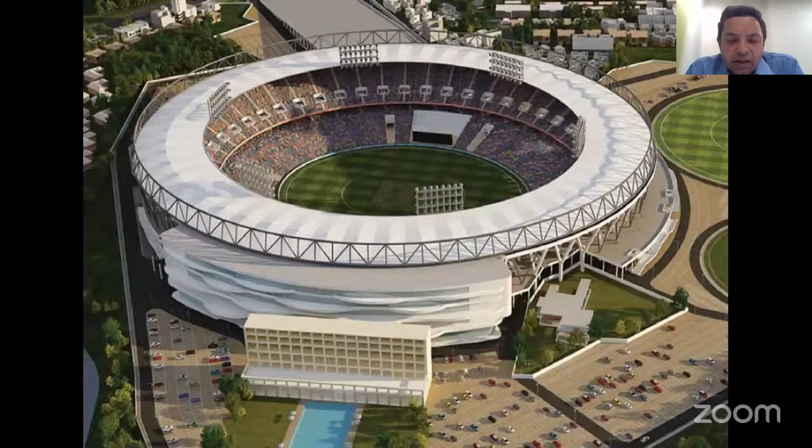What you see on the screen is, of course, our Motera Stadium, or actually Narendra Modi Stadium now, one of the largest cricket stadiums in the world. And the seating capacity, you probably would have heard, is about 125,000 people. And the entire structure was constructed using precast elements, right? Right from the Y columns that you see in this picture to the stadium beams, raker beams, stairs, seating, everything.

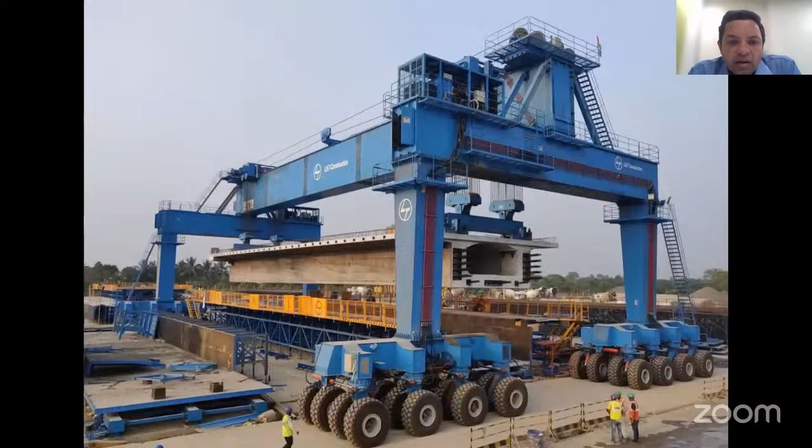This is our high-speed railway construction. The girder that you see is about 40-meter long, 1,000-ton in weight, and fully precast. The whole construction of the entire elevated viaduct is being done in precast. If you talk to that team today, they are more proud about that straddle carrier that was built by L&T in India than the girder. The girder has been their mainstream day to day. They have been doing that for long. And that's where the state of precast is in infrastructure projects.

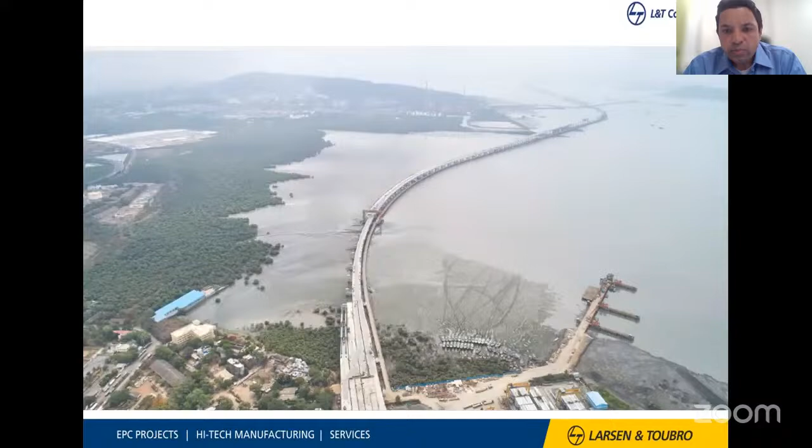If you come to Mumbai, this is our Trans Harbour Link, the Atal Setu, what we call it now, 21 kilometers long. And a significant portion of that has been done in precast. This one picture I wanted to put in, it's not a precast girder, but it's an orthotropic steel deck, right? And why we are doing precast, the same vision is here: you prefabricate everything off-site instead of doing construction on site, right? It doesn't matter.

One of the reasons why we say precast is because our industry is very familiar with concrete. So we are saying you precast the concrete somewhere off-site. But somewhere in the talk, you will see the focus is not actually on the technology. The focus is on how to improve construction productivity, how to improve quality, and you take it off-site.

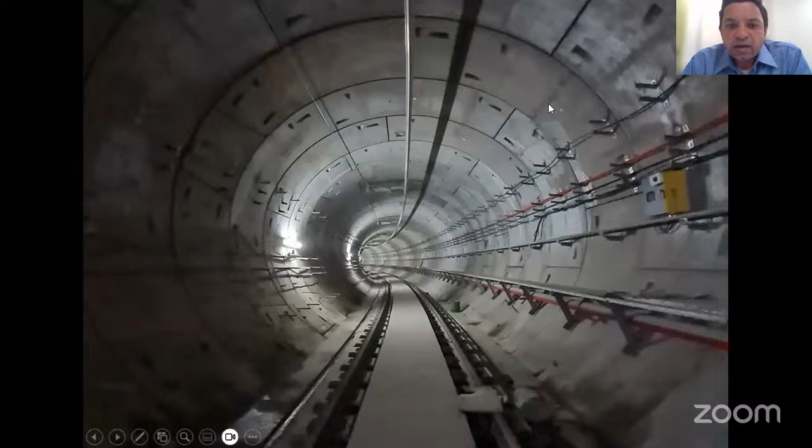And when one of the last pieces was installed, this is where I took that picture. This one girder, which is 150 by about 12 meters wide, was installed on the bridge in under 2.5 hours. Right? If you do conventional construction, even rapid or assembled construction, it takes much longer than that. On the same side, we are building metro in Mumbai now, an entire underground metro sector where the precast comes. But again, that modularity, rapid construction, moving most of the activities off-site.

So with that introduction, I come to this one, where we are looking at why L&T is stressing on these technologies, why we are doing things, what we are doing, how we have changed the way we are looking at construction over the last 4 or 5 years. And in the entire presentation, I would have about 3 or 4 key slides, which I will let you know are the points that I would want everyone to take home, right? Everything else is project case studies, examples and pictures, but these 3-4 slides we feel are the crux of the technology, which the entire engineering industry, the clients or the government agencies have to understand if we want to do business in this industry and continue to deliver.

So if you look at business excellence, what we call it, which is the heart of this scenario, we feel that excellence going forward is going to come through two key things. One is mechanization, and this is where all these new technologies are coming in. And of course, today's focus is precast, but like I said, the crux or the heart or the core is mechanization and digitalization. So these two things have been our new mantra for the last maybe 6 to 7 years.

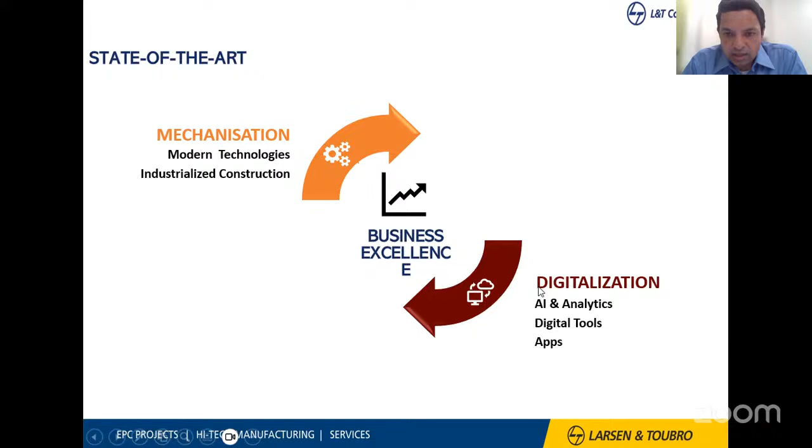And for that business excellence, how we close that cycle is you use mechanization or various technologies and you monitor that efficiency. The entire focus is on productivity for various reasons. One, the project deliveries are shrinking. Whatever was a norm to construct a project in 42 months or 48 months has already become 24 months and 36 months. And when the tenders are coming at 36 months and 24 months, from inside, our management is asking, can you finish that in 18 months? That's the kind of volume and massive amount of work to be done.

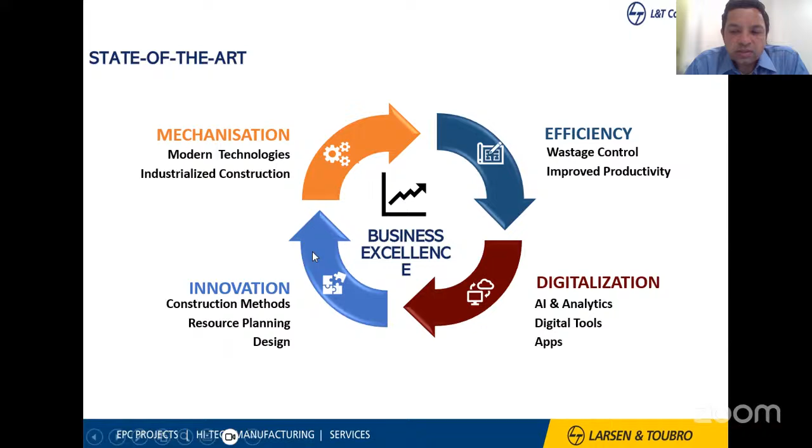So that efficiency is being monitored through digitalization. Digitalization is not being done just for the sake of doing something fancy, it is to monitor. And then when you get that data, we are trying to see, based on that information, what we need to do next, what we need to innovate to further mechanization. And that's where that cycle is going on, and it keeps going based on this continuous marginal improvement.

We are in an industry which is fairly averse to drastic changes. If you see most of the last 40 years, we have been doing the same things, but that marginal improvement is what we look at. Precast, which we have done for the last 10 years, is keep changing, keep tweaking, never settle. Now, from that perspective, if we move to building construction, which is the focus of today, we usually spread those buildings from low rise to high rise.

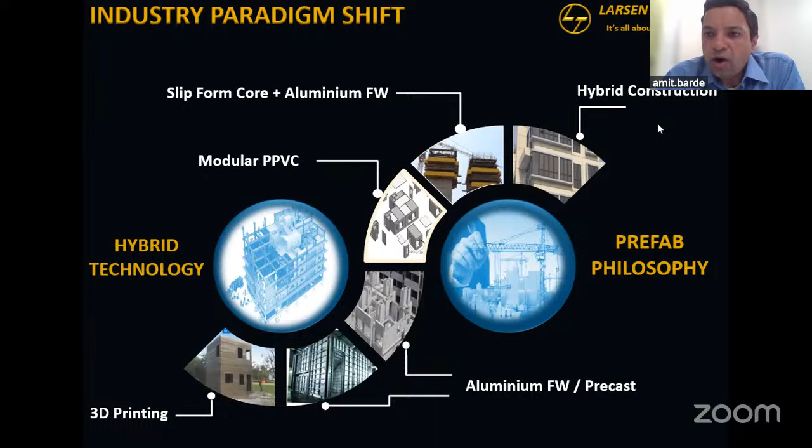And why do we say that? Because working at site is becoming increasingly difficult. Inviting people, the workforce, from staff engineers to the gangs that operate, is becoming extremely difficult. In fact, we have internal guidelines that assume that 5 years down the line, you are not going to have any people who will work on site. And that's where that mechanization drive is coming from. So with that background, these are the predominantly used technologies in building construction over time. Of course, we had conventional formwork.

In the 90s, we tried aluminum tunnel formwork. Then we shifted to aluminum formwork, like I said, from 2000 onwards. And then in 2010, we thought that even the aluminum formwork speed is not going to be enough going forward, for the kind of volumes we are doing.

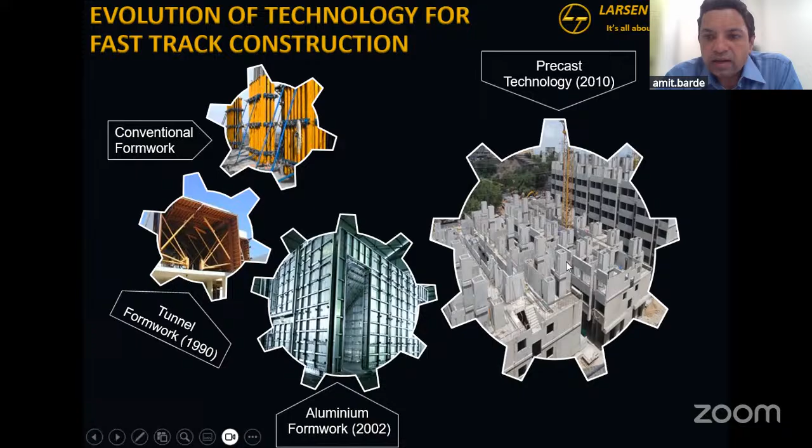So precast came into picture, which is pretty much very similar in terms of the functionality, in terms of the user look, touch and feel to concrete buildings, just that the elements are done at factory level and then assembled at site. So these are some of the projects, the PMAY housing I told you about. These are all total precast buildings.

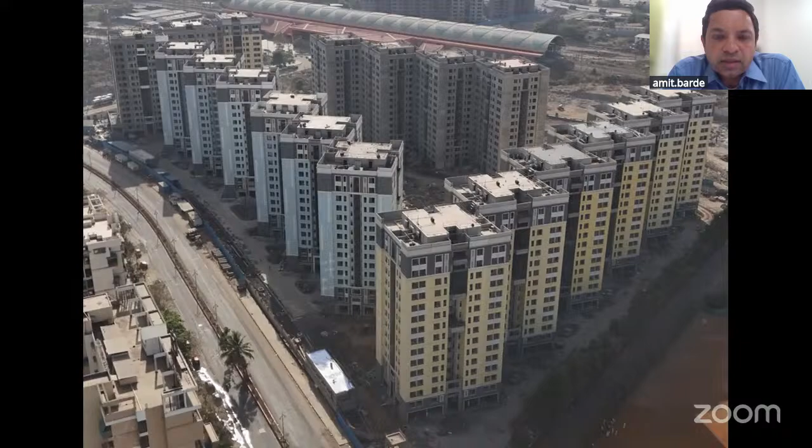Whatever you see in the picture has been built in a time of about 2 years, right? About 7,500 houses. What you see, except foundation, everything is being done in total precast. The finish and all, if you see on the right hand side, there is no external plaster at all. The buildings get installed with factory made elements.

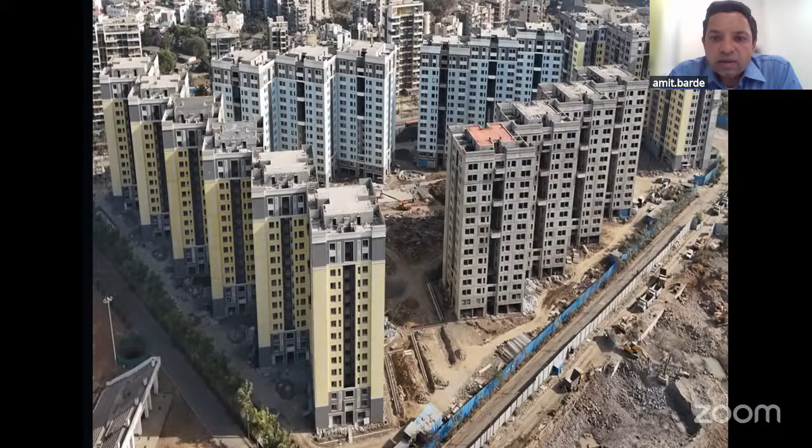They get treated and then they get painted. We don't do any internal plaster also. So maintenance wise, all those chips, spalls, cracks, water seepage, everything is very limited. All of this is M50 grade concrete. The buildings, when finished, look exactly the same as a normal RCC building will look like, right? The same balconies, chajjas, windows, whatever is conceived.

Of course, we have to treat the joints, architecturally as well as functionally, but that technology dependency has been taken off. And we have been doing something similar. This is one of the first buildings that we did in Mumbai in the 2014 time frame. So these buildings have been standing about 10 years. In this picture, you see 3 buildings, but we finished a total of 6 buildings, about 2,000 flats. And in the 10 years, we don't have any significant concerns.

Then we delivered this one project in Bangalore, which is about 30 lakh square foot of built up area, about 3,000 houses. Again, these buildings have been standing for the last 8-9 years.

And this one picture I would want to spend a little more time on. When you adopt a technology, a lot of focus goes on the engineering and detailing in L&T to make sure that the delivered product is very close to whatever the industry mainstream norm is, right? So if you go here, a lot of engineering time is spent to make sure that the architectural elevations, the overall general look, touch, feel is the same as buildings built by conventional norms. And not only from external, but even from within.

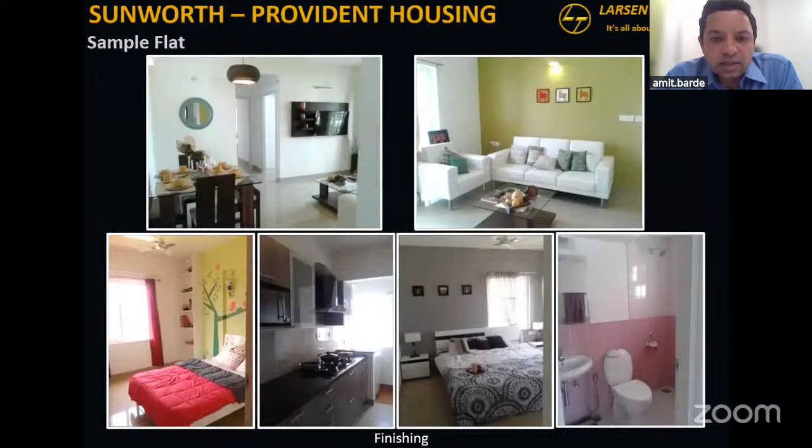We set up this mock-up flat using the same precast system. This is one of the finished flats where you can't see it now, but close to this corner, there is a precast joint. On the wall, there is a precast joint. At the slab level, there is a precast joint. And once it's finished, even our own engineers cannot find where the joints are. But the time is spent to bring that finished product to that level.

Not only residential, but even commercial we have done. Commercial is picking up now, but the system is the same. Wherever you want large spans, open spaces, the system changes from the classic load-bearing wall system for residential to a beam column frame system. You will have a column element, a beam element that will span about 8 to 10 meters, and then either pre-stressed hollow core slabs.

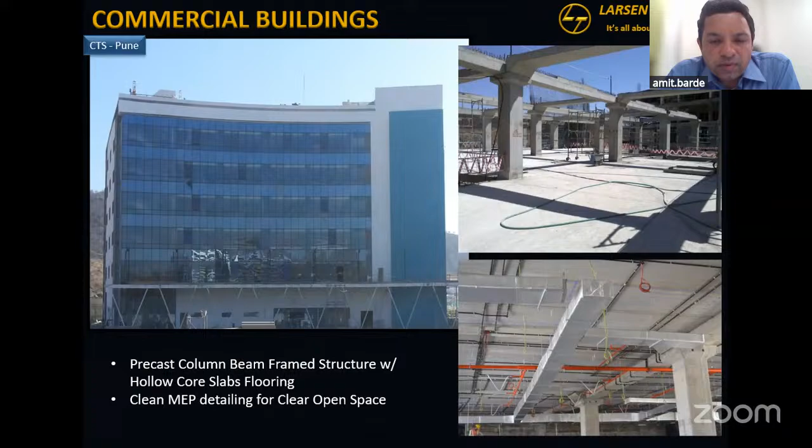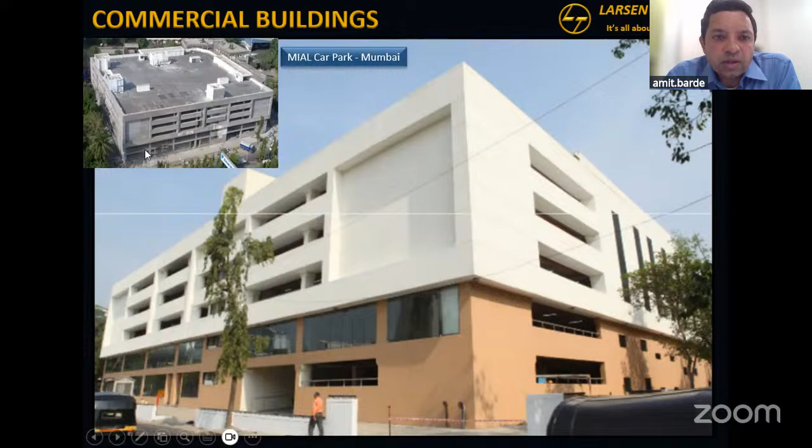The outside world is using even double T's and various elements, and that will probably come to India soon. But various systems are in place, accepted by the client. This building was done in the 2015 time frame. If you ever come to Mumbai, if you go to T1, the Santa Cruz old terminal, that's a parking structure you will see on the left hand side. Again, the building has been operating for 10 years.

Facade elements, we do a lot of work in that space. This again is a very unique project for IKEA in Navi Mumbai, with a steel structure, and they wanted the floor slab in hollow core slabs. Of course, the client came up with that, and we're glad they adopted it.

But there, one of the main requirements was a 16-meter long span with 750 kg per square meter full warehouse load. These are 400 deep slabs, but no shoring when the slabs were installed, right? Because the floor to floor height at that level is about 8 meters.

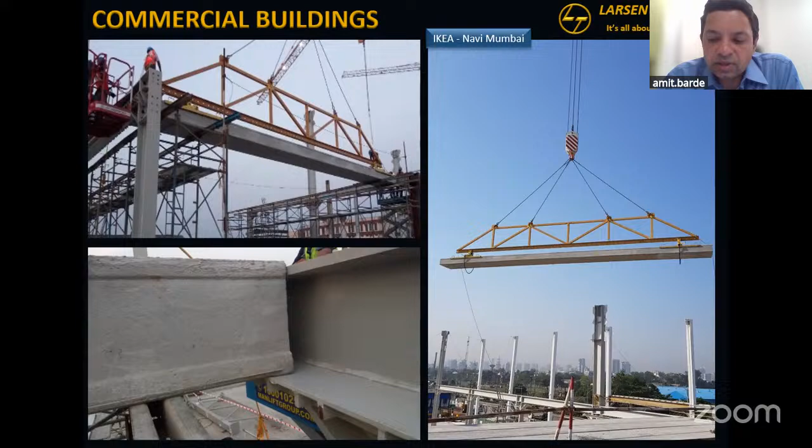So we would have to do a lot of shoring. So what we proposed is one single element in hollow core slab, and it was completed in about 50% less time compared to conventional slab construction.

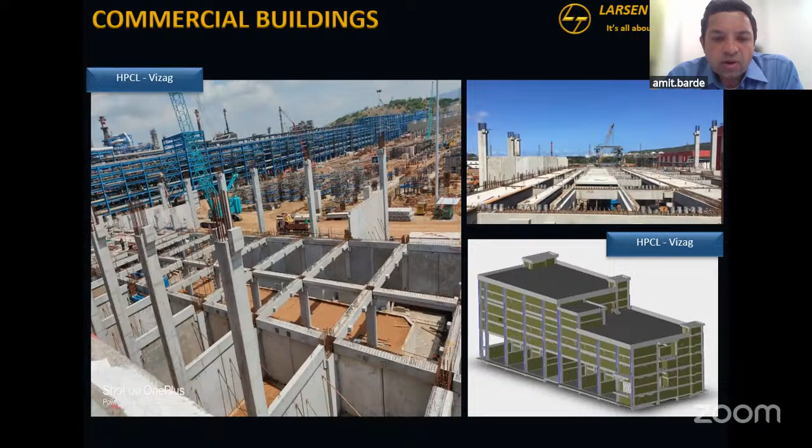This is one of the substation buildings we handed over now in Vizag. One 4-level and one 5-level substation building next to each other. Again, very heavy loads, all the openings, coordination for the routings, cable ducts, routing, all coordination done, and total precast using beams, columns and slab elements, and of course outside walls.

So this is one of the unique ones again, where if you see, the architectural vision or the perspective was boxes and the vertical columns. And originally when the job came, this was planned in block work. So imagine this would have been a lot of block by block construction all the way around the building and then plaster it. So we said we will convert the vertical ones.

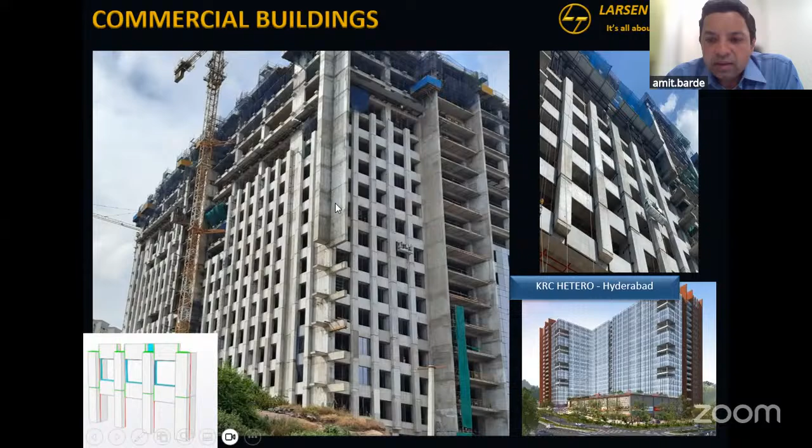And since we were converting the verticals, to match the finish, we even did the exterior cladding horizontal. So that entire facade has been built in precast elements level by level and then directly painted. And that worked well in terms of productivity again.

We took the next step, this project as a mock-up, because this next project is in Mumbai, right next to our office, where it's a steel building. So we said, if it's a steel building and a blockwork facade, why not try precast with steel inserts or embeds that can be attached to the structure by welded connections. So we did this mock-up. This is attached to that steel structure.

Later, due to the timelines and availability, finally we didn't do the project, but we are now proposing it at various projects because of that productivity improvement. So if I have to give that benchmark, in this mock-up each panel was attached to the structure in about 30-35 minutes with the connections done and the crane doing the next panel.

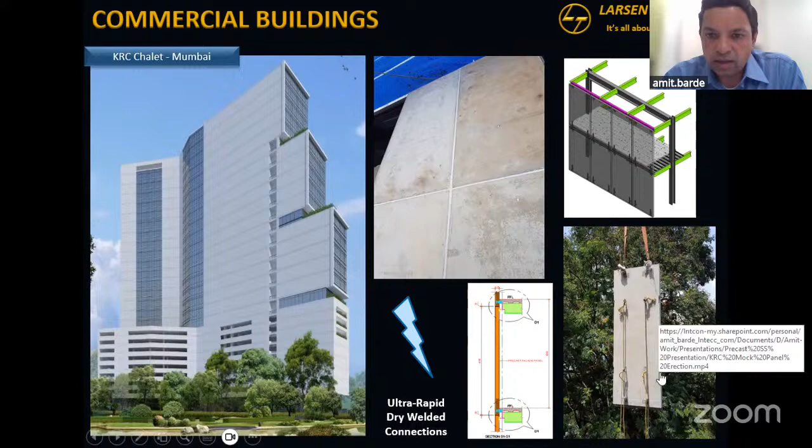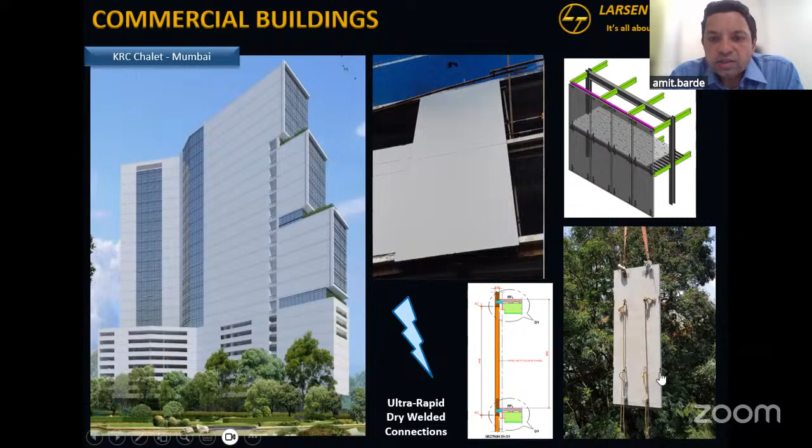Equivalent block work will take at least 3.5 days with a gang of about 6 to 7 people. And this was installed by a 3-person gang in about 35 minutes. So that's the productivity we are looking at. As long as you know what you're doing, as long as the engineering, design, detailing, joint connections are done, that productivity is enormous.

This is one of the projects in Bangalore, you may have heard of it. The DRDO building, a mission building for us, which we finished in just 45 days flat, a 7-story building. In that, the surrounding structure was steel, floors were precast slabs, and the toilet units. To improve the time, the toilet units were actually produced offsite and finished there. So in the pictures that you see here, the fully finished unit was brought to the site and kept.

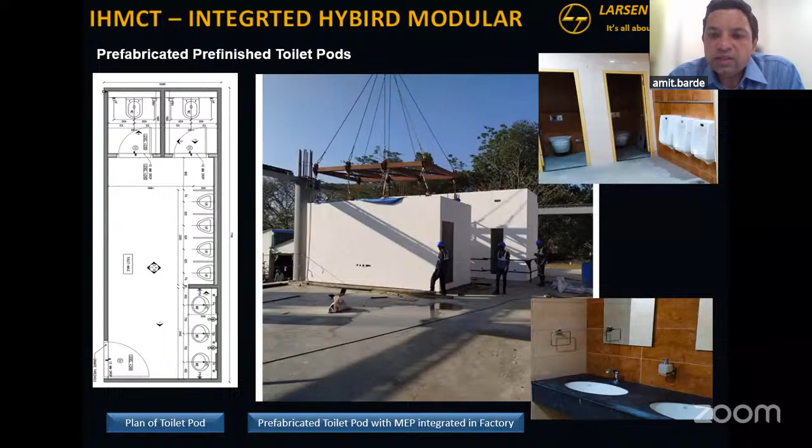So again, the idea is not precast technology or steel construction. The idea is to work offsite and finish as much work as possible in that controlled environment on the ground and get it done. Now coming back to residential, we always keep saying, is this rocket science? No, it's been used for a while.

If you tour Singapore, all of these buildings have been done in a total precast system. From outside, they don't even feel like they are precast. So that jointing and detailing has evolved. The same we are adopting also. The entire Singapore mass housing, social housing has a lot of examples, a lot of buildings standing for more than 30-35 years.

Then, not just the commercial building, we also use pre-finished toilets in residential buildings. So a similar example, this is a toilet pod, as we call it, in a residential building with everything finished inside. Before we even construct, all this is finished offsite, including the accessories. And this exact pod is lifted at site, installed, and then the surrounding structure is constructed.

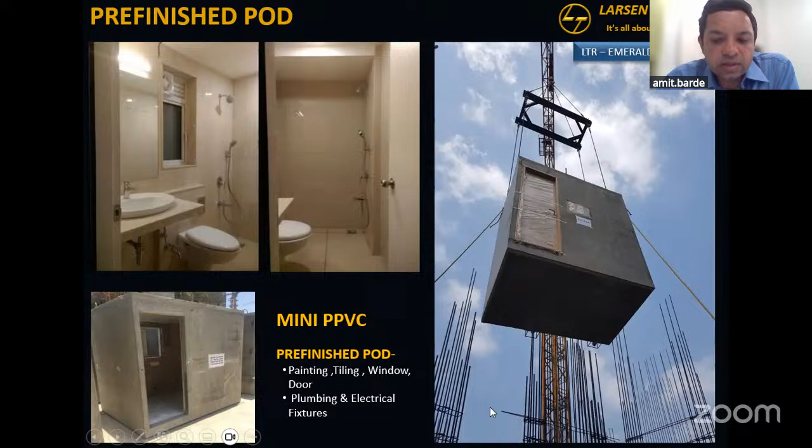So we set up a factory right next to it, and this is where it all gets finished. You produce the elements here, if you see my pointer, and then you keep it here, finish everything, and then directly lift it off and put it in the structure.

Why don't you finish the entire building itself? Why just the rooms? And we'll probably come to that stage also. But if these people are talking about it, I'm sure the engineering community has to pick it up.

Now, I told you about those 3-4 slides. So 2 are already done. This is the third slide. Why we are driving this again and again, and where we are coming from, is our own internal data, our own sites, where we have one aluminum formwork site at the same location, maybe about 3-4 kilometers away. So same team, same project director.

And we started looking at the data: what is the productivity that I'm getting? If I look at aluminum formwork and track 1 cubic meter of concrete, I'm looking at about 5.5 people required to finish that 1 cubic meter of concrete at site. If you split that 5.5 further, the actual concreting activity is about 1. The shuttering, tying the formwork and everything is about 3. And then rebar work is about 1.5. Those are the key CSR activities, as we call them.

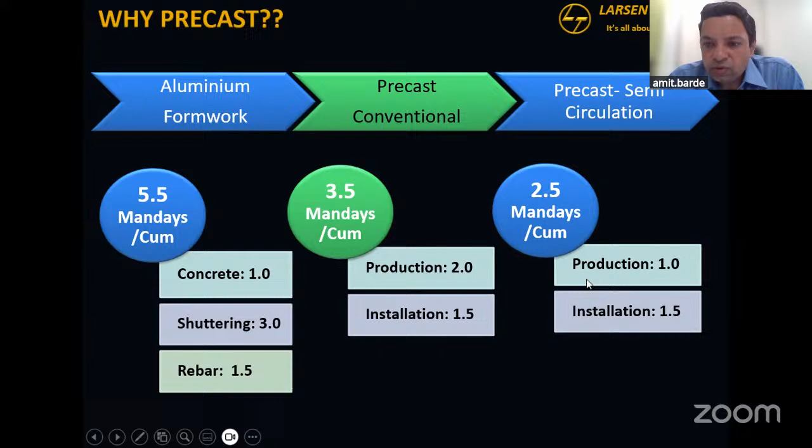But the key item to look at is that all this 5.5 manpower or workforce is at site, the entire work. But here, if you see, only 1.5 is happening at site. So one of the biggest things driving us is that reduction in site activities, which is almost 70%. And today, if you ask any project manager or project director what is one of the largest risks in their mind, it is: I have that plan.

I know I can do this work in 8 hours, but whether those 10 people required will be there or not. And if they are there today, whether they will come tomorrow. If they come tomorrow, whether they are coming next week, or I have to hunt for people and get them. And this is where we are looking at the factory or controlled environment: people like to work on ground. People like to work in factories.

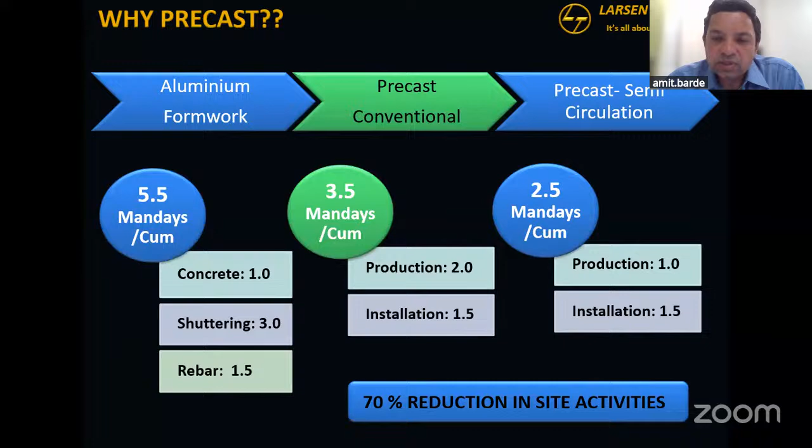We don't have that workforce anymore who is genuinely interested to work at site and climb 20 floors every day, even with the elevators, and work at that level, right? We have much better jobs available than working on sites. And day by day, we are seeing workforce reduction; whether skilled or unskilled is a separate matter. We just don't have people who want to work at site. And that's one of the biggest reasons why we are looking at these technologies.

Now, when it comes to the system, okay, we have seen various projects. We have been using this precast technology for, I think, the last decade or so. We get various questions, a lot of questions. And if I have to summarize all those questions and concerns with their weightage, there are 2 things that come to my mind that are of key interest to anybody who wants to adopt it.

What are those 2 things? One, whether joint-by-joint, element-by-element construction will perform adequately for seismic design or not. And second, if you do these joints and all, how do the structures behave or respond to leakages, seepages, or water? So I'll just quickly go over those 2, and then we'll more or less conclude.

So the first question is structural integrity, structural performance. And when it comes to that, we are 110% confident that the design detailing approach we have adopted over the last 10 years will work in all those kinds of requirements when it comes to seismic or any lateral loads for that matter.

We have done our own set of full-scale tests. One of them is in front of you, where we built a full-scale specimen, 3 meter tall twin shear walls. So imagine 2 shear walls like it's shown here.

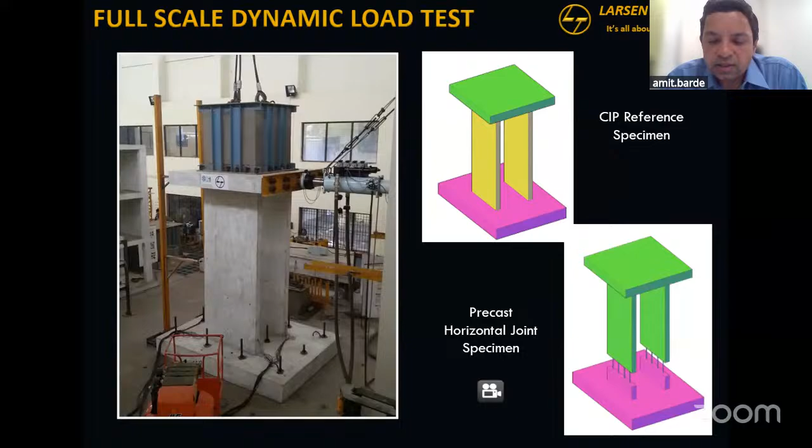So one specimen was tested in the exact same setup, which was the cast in place setup. And then 3 more specimens we tested with various types of joints and the approaches that we do. And again the idea, like I said, we are using this emulative detailing, which is wet construction. You stitch the elements together. We are not using welded or bolted connections. And with that emulative detailing, we wanted to see whether it will perform the same as your cast in place or not.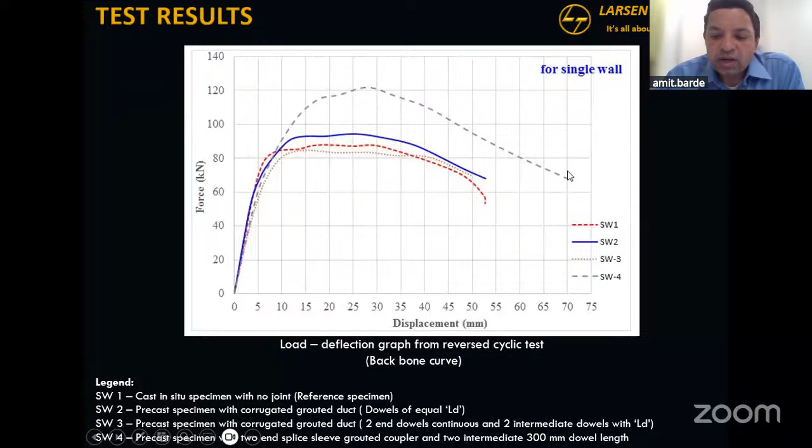The last one, SW4, was with these grouted coupler connections, which work slightly differently, specifically for the precast industry. And that gave me a higher ductility or higher R value. And why is that? It is usually because of the confinement, the metal tube confinement that you get. And we tested these elements also separately. If you see, this was done at that time, 2016. We did not have any setup here which would do the reverse cyclic test.

So we took the specimen to a lab in Hong Kong, Castco. And the way these are tested is, if you see this graph, they are tested reverse cyclic, the same way we did the lab experiment. The coupler is grouted, cured to strength, put in the tensile setup, and then it's pulled to 95% tension and pushed to 50% compression. And we do 20 cycles like that. After that, it is pulled to twice the yield for 4 cycles, then it's pulled to 5 times the yield for 4 more cycles, and then it's pulled to failure.

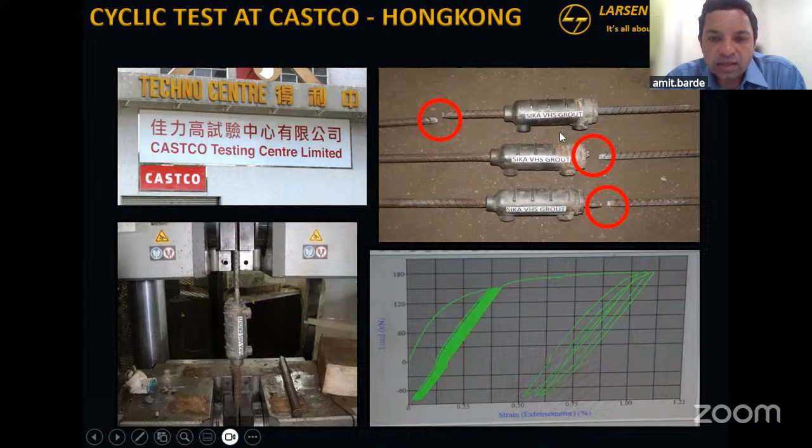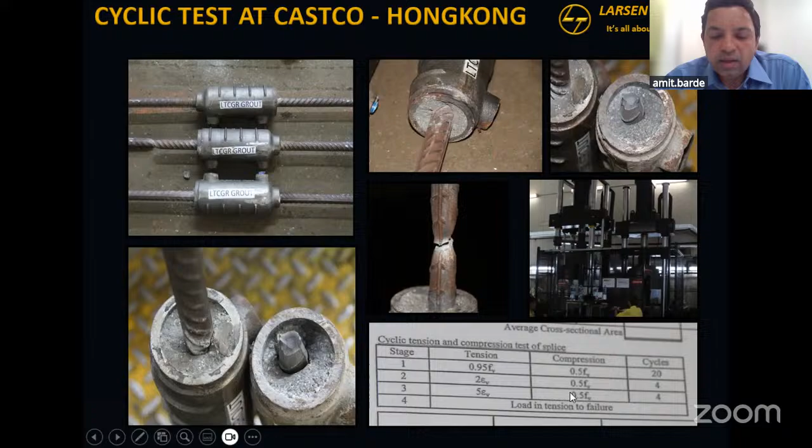And the requirement is the bar has to fail, not the grouted tube. Right? And that gives you that classic ductility of that connection system. And you'll see that in every setup, in these bars, the classic ductility hinge forms, the neck forms, and that tells me that these grouted connections work in terms of seismic, and then the full scale specimen itself. So then we did the full program of other joints, vertical joints, the diaphragm joints, in all aspects.

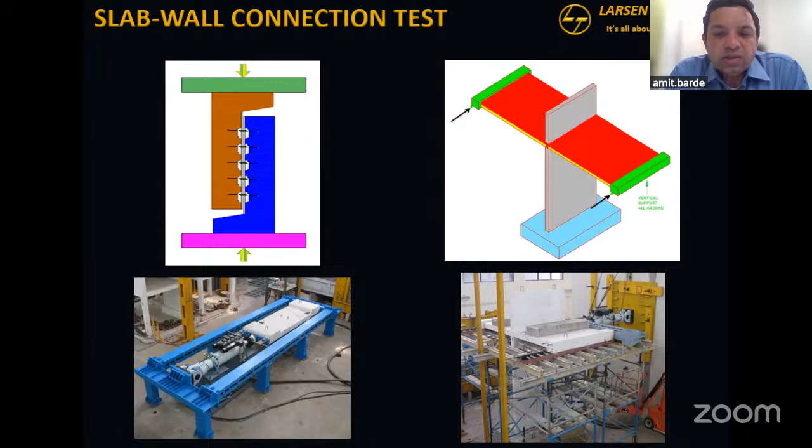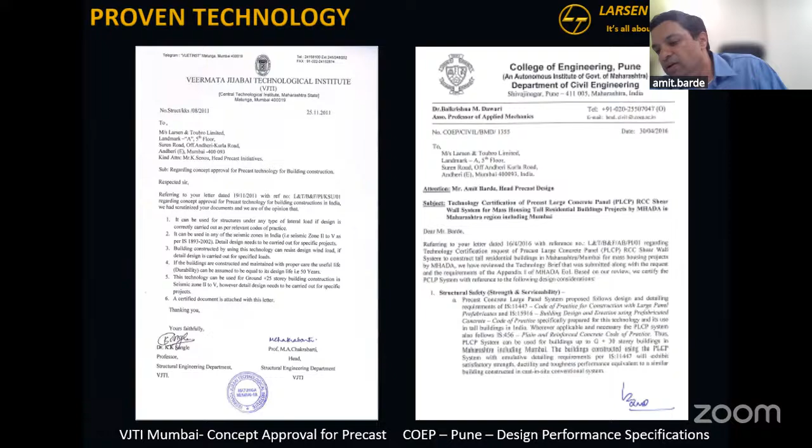Again, I would like to reiterate, the connections we are using have been used for more than 50, 60 years outside. So it's the same thing we're repeating, but for our own due diligence, for our own detailing, we verified that. And this is where that confidence of 110% is coming from, and this is why we have had several rounds of approvals for this technology, because of that emulative detailing. Down the line, maybe we'll evaluate welded, bolted connections for commercial and all, but that's a very separate story. But right now, what we are doing is exactly this, which is where that structural performance will be ample.

Now, the second thing, right? What is your performance against water? Now, here I am not as confident, right? Here I would probably say that, okay, 98, 99% the structures behave, because concrete itself is a permeable element. No matter how much you do, how much you waterproof, water is going to find its way. But I would confidently say that it is performing better than your conventional systems, right?

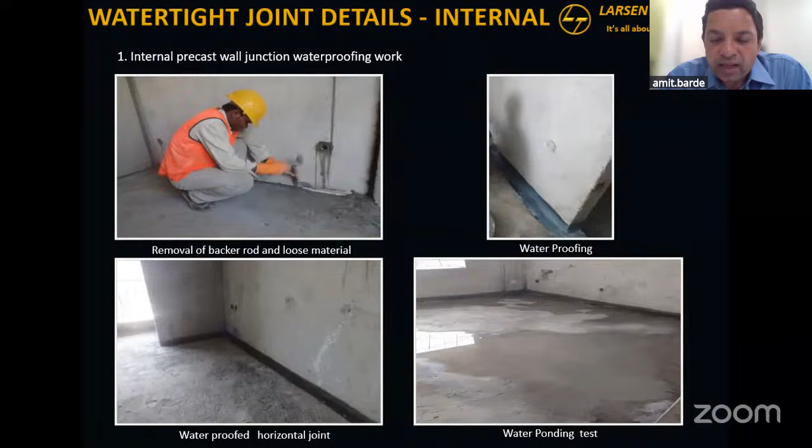So to give an example, this is a classic SOP that we follow when we treat our joints. There are 4 or 5 different levels of defense built in. But to verify that, each flat that we are building and delivering now gets fully flooded with 1 inch of water, and the water stays there for 4 hours. After that, we look at all the joints, we look at the flats below and see if there is any leakage or seepage. That 98, 99 is where in 2-3% we find leakages, then we repair, and then we test it again to make sure that it has been controlled.

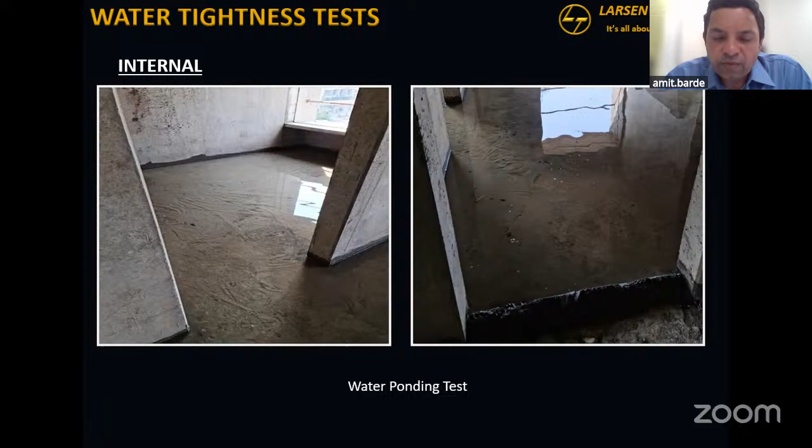So confidence level, yes, I wouldn't have 100% confidence, but we are making 100% effort to make sure that all these flaws are detected. Same way for external, we do external testing. There are codes available now. There is IS 15916, which specifies these requirements. Of course, internal we are doing on our own, but 15916 will specify for external. But all these joints are getting tested. And where we stand today is we don't have any leakage issues in precast or joints.

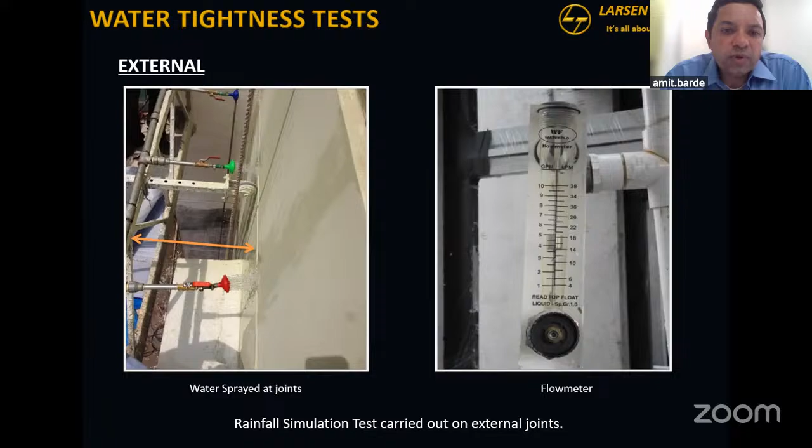We do see some seepage, which is a very different structure, very different phenomenon, that you see the moisture and then it disappears, but we don't have dropping or dripping water challenges, right? Based on whatever engineering we do, detailing we do, we score our buildings, we track everything, and that is being recorded and given, right? So those two concerns; of course, we'll have a Q&A also if you want to go in more detail.

With that, I'll take maybe 5 minutes extra, but we are at the end of it. Just going through the current project, so that you get the flavor of what we are doing and to what scale it is suitable. I mentioned earlier, we are doing 2 projects right now. One is about 7,400 houses. And then we got a repeat order for about 11,000 houses, where we are setting up a new factory, which will go into operation from March this year.

But this is that project, right? Elements like this are where this technology fits in beautifully. If you look at this scale now, about 8 flats per day. If in conventional construction they say, I don't really want 8 flats, 2 flats a day is enough, then this technology is not for you. It would not make sense, and it would not be economical either.

But the current project we got is 11,000 houses, and the client said it has to be finished in 36 months. And in that time constraint, precast construction is actually slightly cheaper than aluminum formwork construction, because at that 36-month duration, or structure completion of 24 months, the number of formwork sets I would have to mobilize to guarantee that timeline would cost more than setting up the precast factory. And that's on paper, right?

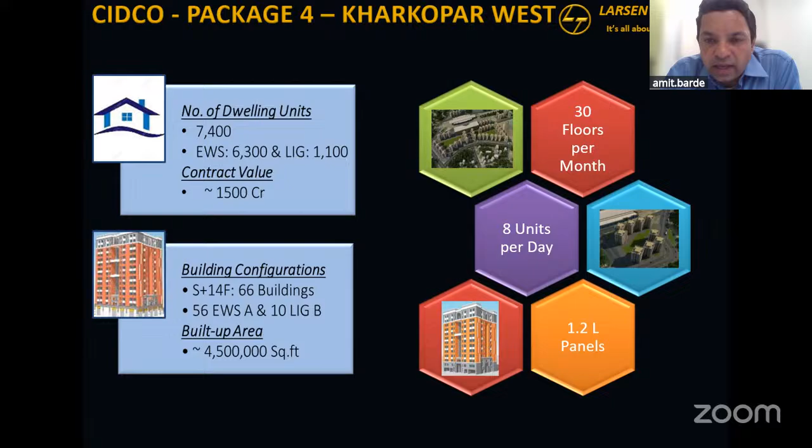We say that every 15 days aluminum formwork will give me one slab, which with the challenges and everything actually goes to about 17 to 20 days. Whereas with precast at that same cost, we are operating at about 8 to 9 days per floor cycle. So that's where it makes sense. Large projects; this is the project in view.

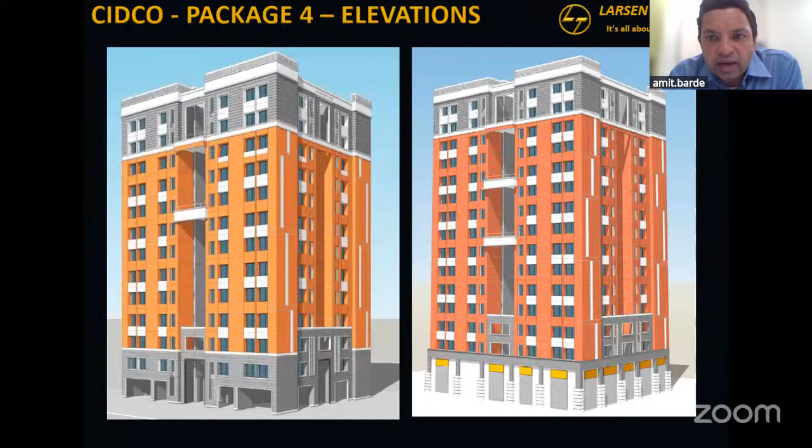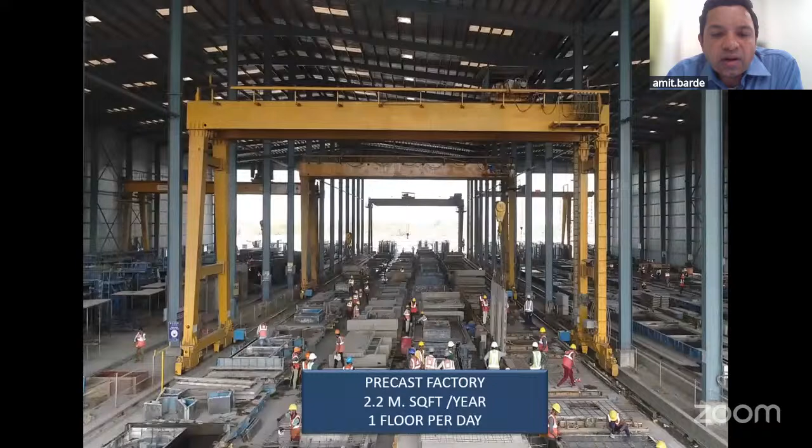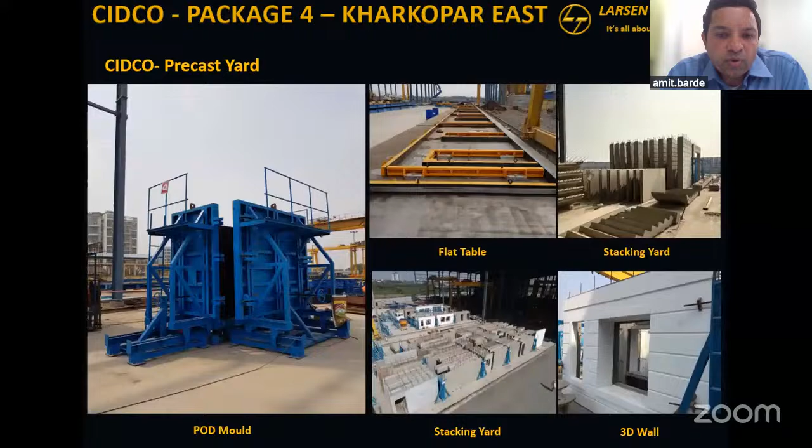We set up what we call temporary factories, but by no means are these temporary. They come with a full shed, the whole 9 yards, the same quality lab, the same concrete batching plant, which will pour concrete at that same level. Just that in 3 to 4 years we will scrap it, because we set up the factory at the project site itself, so that we don't have the challenges of infrastructure and transportation. We don't have the road network to efficiently transport big elements. Hopefully it will come. So that's why we call it a temporary factory, but it's a full-blown setup, various molds, some imported, some done in-house, and these buildings are there in front of you.

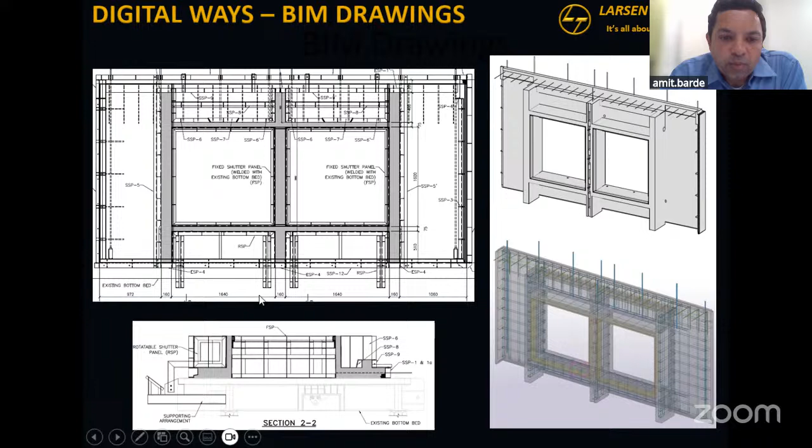We use various digital tools also to track these buildings. So that's the circle I was mentioning, mechanization versus digitalization. We have now adopted BIM, as you see, where even a single number 6 bar gets modeled. At the click of a button, I get the 2D drawings. Even the mold drawings are generated using that same model. And once we have that, each element gets tracked.

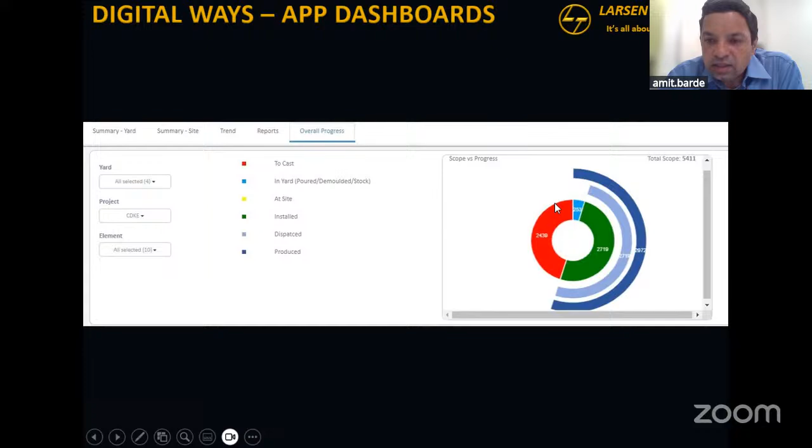So that level of quality: for each precast element we are now issuing, I have the record of when it was cast, using what kind of concrete, at what strength it was demolded, who signed the checklist, where it's been stored, when it will be picked up and shipped on the truck. At any given time, how many panels are sitting in the factory, how many are on the truck, how many are actually being installed at the tower. Everything is tracked in real time so that we know the real productivities and the workforce.

So with that, we are at this last concluding section. I mentioned we are building about an 8 to 9 day cycle per floor of about 450 square meters. It changes per the floor size. We have been doing that for the last 2 years, and one of these days, when one of our top bosses came, he said, "Okay, this 8 to 9 is fine, 30% you have shown, but what's the best you can do?" And in those discussions, the challenge came up: instead of these 8 days, can you do this in 3 days per floor?

And we said, yes, we can probably do that if you give us a lot of resources. So then the discussion was, okay, don't worry about the resources. You ask me whatever you want, I will give you, but show me the best you can do. So what we did is, if you see this picture, the way we usually operate is 2 buildings, and these are the same buildings I showed in the picture. So 2 side-by-side buildings, there is 1 crane, and that caters to 2 towers.

Now we said that for this 1 tower, if you want to build fast, give me 2 cranes that will cater to 1 tower. So it's as good as a 4 multiplication factor, right? So he said, okay, you do that. And I will come back to the number of cranes, because most times people start thinking, oh, that's a lot of extra money.

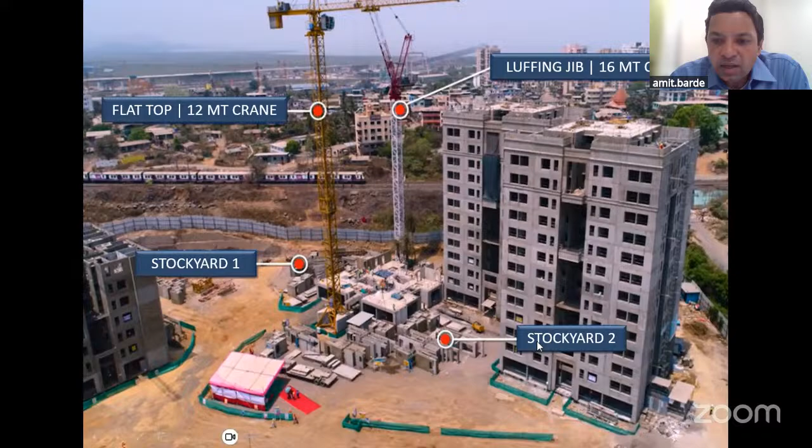So with these 2 minor changes, 8 days per floor was changed to 3 days per floor, right? And that's how we have built this building. Right from the ground floor, the first floor itself was built in 3 days, and then each floor we tracked it. I'll show a quick movie later. But in 36 days flat, that structure was built, right?

We did even the precast water tank for that challenge, because we wanted to finish that building in 96 days, because the building has 96 flats, a 12-story building with 8 flats per floor. So we said mission 96. So 36 days to build the structure, and then about 60 more. The finishing started on the 10th day, because it was precast, after the first 3 floors were done. In about 86 days of finishing, this building was handed over in 96 days exactly.

Now coming quickly back to the crane. The total man hours or crane months that we tracked later were actually less than what was planned if it were done by one crane. So resources, even if they appear more, because of that productivity, the net was in fact less.

How much more productivity on average? Usually these cranes install about 20 to 25 elements a day, with all those challenges: the element is not there, the crane is tied up, the factory element is not there. Here at peak, that same crane installed about 40-45 elements per day. So at peak, we installed almost 92 elements per day. And that's where the cycle time reduction actually pays off on its own.

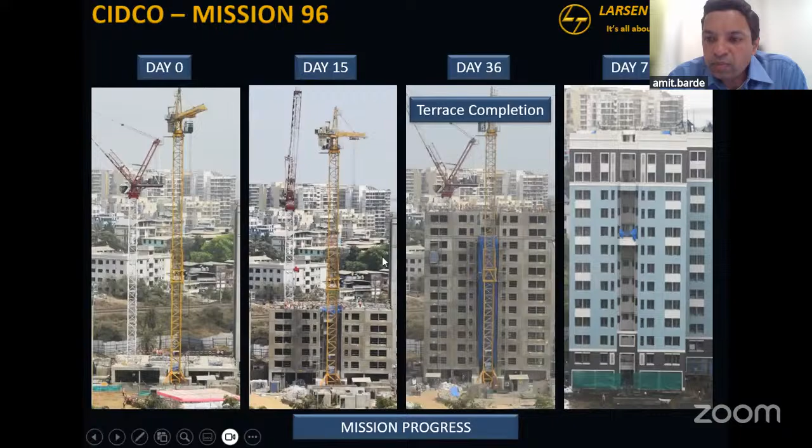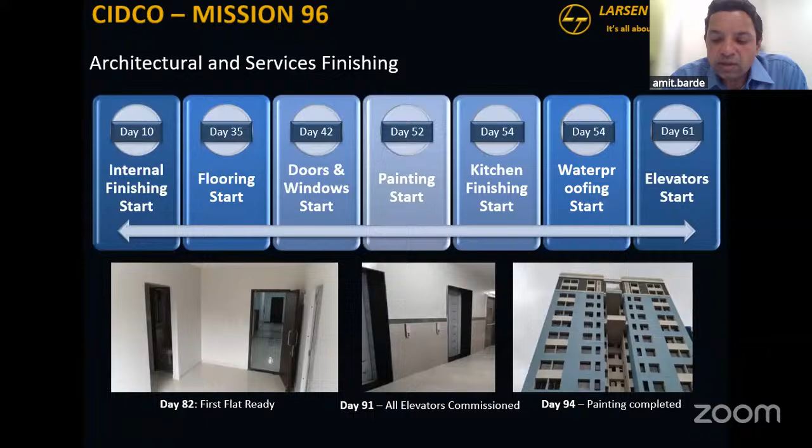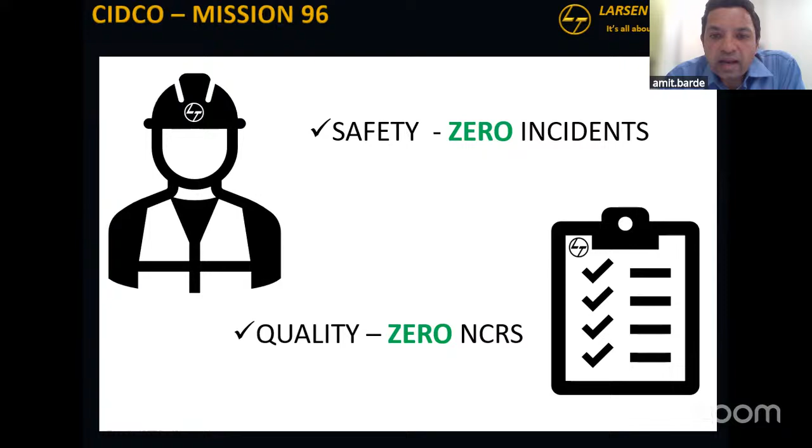So it feels like the resources are more, but at net, maybe marginally about 5 to 6% more was spent for this productivity improvement, which is drastic. Of course, various digital tools, I don't have time to go over. One of these things is that all 36 days were absolutely without any safety or quality incident, all the way to 96 days. We had that tagline: without safety and quality, your speed has no meaning. And with that, this mission was completed.

I have about a 3-minute video on the same, just so that you can look at it in real time and get a feel of that. I hope that is okay. Timeline-wise, I know I've already used about 30 minutes. So if that's okay, I will run that video. I shared with audio, so you should hear the audio itself.